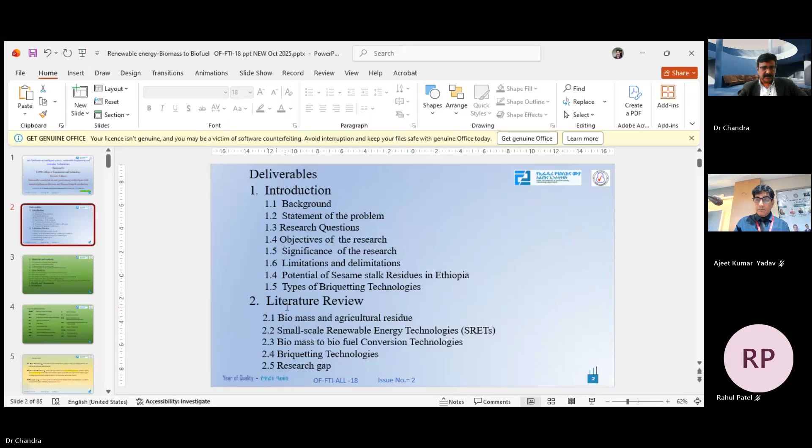These are standard headings so we will not waste much time. Then we have literature review, and we go to the next slide. So, materials and methods, and we will go for data analysis and then results and discussions.

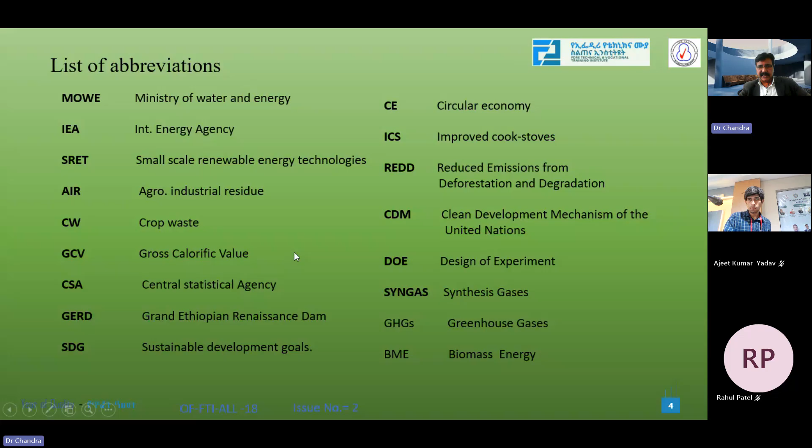Some abbreviations may be new, like MOWE, Ministry of Water and Energy. Circular economy we may use as CE, IEA for International Energy Agency. SRETs are small renewable energy technologies. AIR we will use for agro-industrial residue, crop waste, and gross calorific values, and SDG for Sustainable Development Goal. Syngas for synthesis gases, and greenhouse gases we all know.

So let's begin from the basics, like what do we mean by green engineering, sustainable engineering, renewable energy, and others. When people say green engineering, it's very common, green means it is related to environment, and mostly it has come from the plants.

The forests and plants are very important and vital for the ecosystem, for giving us oxygen, for controlling the environment, especially by absorbing the carbon dioxide emitted from vehicles, households, furnaces, electricity generation, and so much burning that we use even in stoves, which emits carbon dioxide.

So green manufacturing mostly focuses on our environment, and we should talk about pollution control and ensure our environment is protected. This includes eco-friendly materials, and nowadays we all know we are working on biodegradable materials, and also going for miniaturization — we should not waste too much material that could instead be produced using smaller amounts.

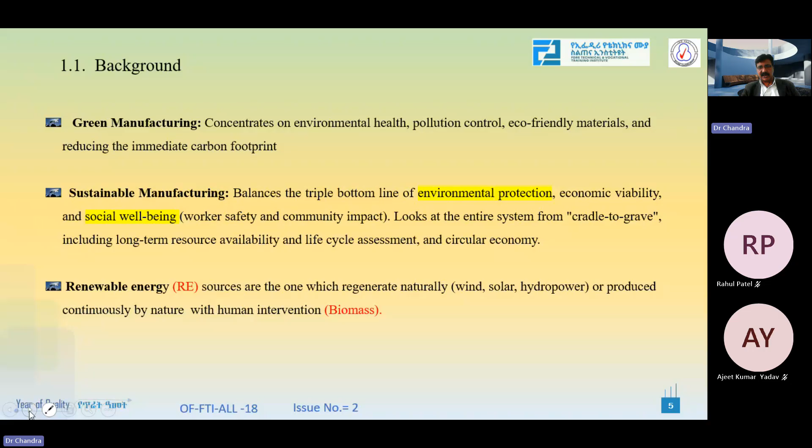Renewable energy - we know those energies which are renewable in nature, like wind, solar, hydropower, and they naturally appear and are available. Biomass - people talk about what is biomass, what are biogases. We have a lot of crop-based resources, and in India we are an agricultural economy with many crop-based leftovers. Awareness has to grow because leaving out maize straws, paddies and other things causes them to decompose and create methane and other gases.

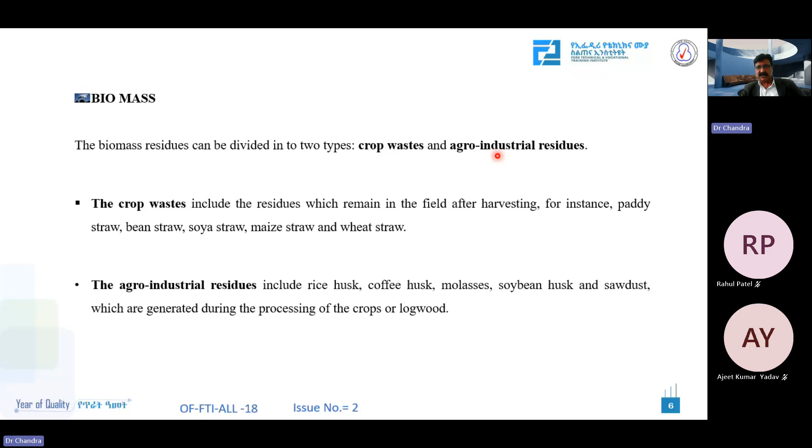Agro-industrial processing of agricultural things leaves byproducts, maybe coconut byproduct or maize cobs left out. These things fall in the category of biomass. We won't go much into this, but you will see some pictures. Globally we use 15% of energy consumption from biomass, and some countries use 90%, like Thailand, Philippines, and more of the African continent.

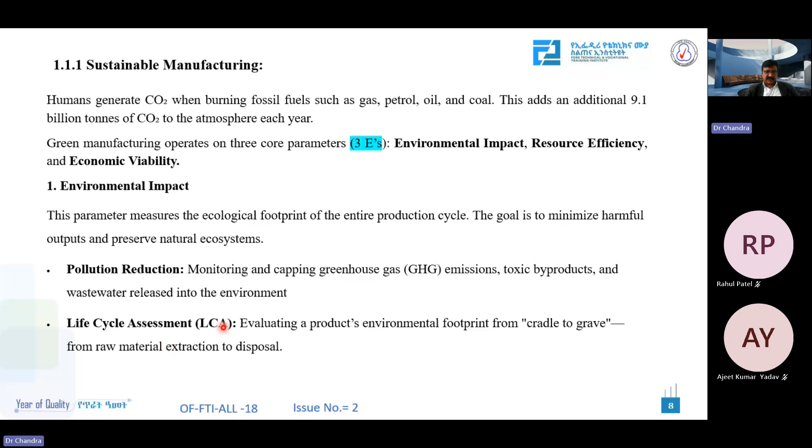Now we will see sustainable manufacturing, as we already cleared, has three things: the environment, that is the green part, and the other two are resource efficiency and economic viability. We will see the life cycle assessment in detail - people work on life cycle assessment, and we will see some examples.

You can see here the CO2 coming and nitrous oxide from chemical and other things, in gigatons of CO2, which is more than 50. From 1970, if we start, it was maybe little amount, around 30, and it has almost doubled. If this continues, I think it will be very, very difficult.

You can see the yellow part - transport and industry take the major share, and then energy production and conversion, that is again oil exploration and all that we do, is also a major huge contributor. Now people have understood the CO2 contribution comes from these areas, and that's why alternative energy - we mostly use solar nowadays, and we are also trying electric vehicles.

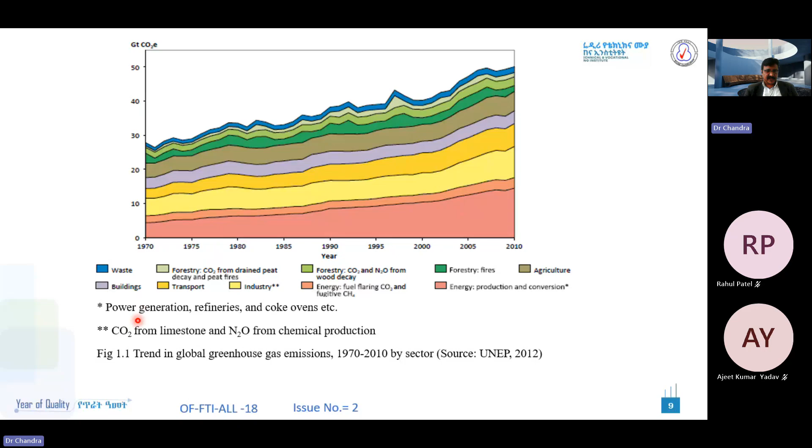So these are the indicators. When we say resource efficiency, we understand that any industry being set up today should not only focus on pollution standards like ISO 14000, 2000, but now they have to reduce, reuse, and recycle. Such things are the focus for any new industry to be established.

We know these biodegradable materials and recycling, whether plastic or iron or other things, involve a supply chain and refurbishment - old equipment is taken away and then refurbished to be used again.

Now coming to efficiency, we can achieve it by optimization, by new material, but innovation is very important. What do we mean by innovation? Innovation is something very different from the past concept or past technology we use. Generally we use adaptive designs - whatever is there, we put it into a similar type of fan in one way or another. Sometimes we use it for pumping, same mechanism; sometimes for air blowers - that is adaptive.

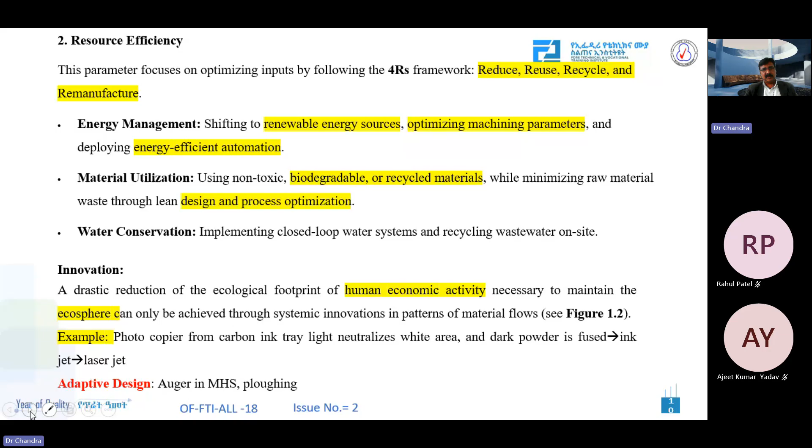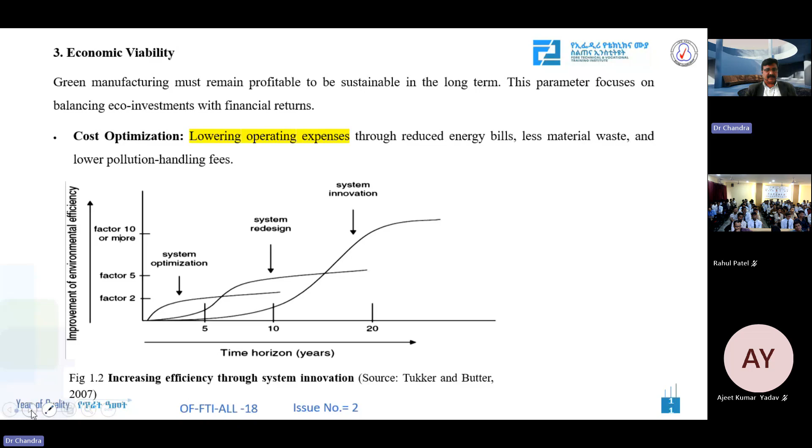Innovations are the way, and that's why innovation centers are created, incubation centers are created, and now we are also doing startups in India. You have to think of making something new. We are relying on something - if the house is made of bricks, we just see it's available, this one, and adaptability is not there. People are very hesitant. So we have to make our thinking different, and we should adopt an innovative approach.

So I think the focus, and nowadays a lot of discussion is going on about the budget on education, people are saying, and you are all aware, yes or no? Hello, are you hearing me? So we know the budget - in 2014 it was 80,000 crores, now it has increased to 140,000 crore.

But if we convert it in terms of GDP, it is not significant. In dollar terms, it is really alarming, and people have to be aware - we have opened so many universities, and now the share becomes very small. So I think these are some of the things.

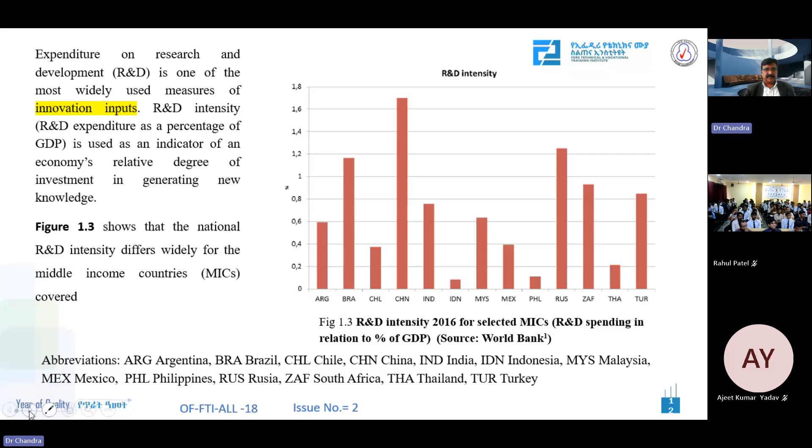Now you can see other countries like Brazil - Brazil is much above India. And if you see a country like Malaysia, their GDP is very small, but still they are sharing, no problem for them. And if you see a country like Turkey, their situation is still such that it is clear they are really doing relatively well. So we have to focus on that.

Now because we are talking about green and sustainable planet, researches are going on - because of too much CO2 emissions from different sources, they want to pressurize it with very high pumps, and at high pressure it can become liquid. They want to put it in the earth's core where these stones are, and this will slowly get converted - oxygen will be released, and carbon will be left so that this can again become fossil fuel. These things are already in the research areas in developed countries.

Miniaturization - I have already talked about making smaller items, smaller things. We should not make things too big. You know everything is becoming smaller, even a SIM card, we are going from normal to micro to now nano, and then no need, it can be removed. Similarly there are many things - if we see engines earlier and now, we don't want to unnecessarily waste too much material. So these are miniaturization approaches.

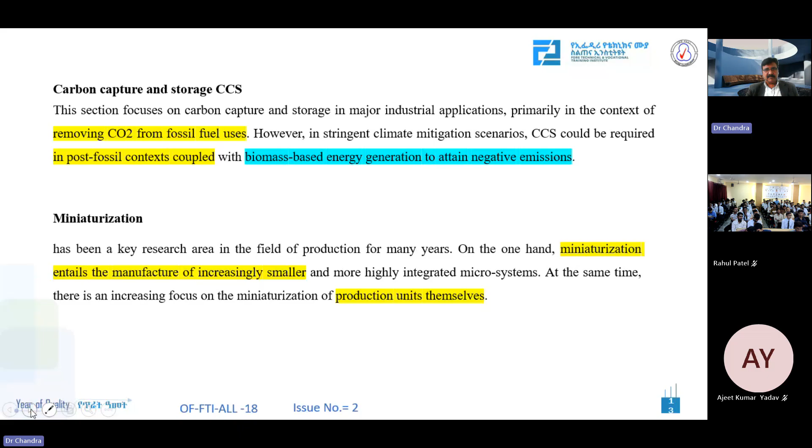Now let's go fast to some examples related to mechanical engineering and different areas, like how we do these things. We talk about green manufacturing - examples like near net shape forming and near net shape powder metallurgy. So now we are not converting solid material by forging or by melting and giving shape through casting.

We are trying to give near net shape by powder metallurgy forming, so very small amount of machining is required.

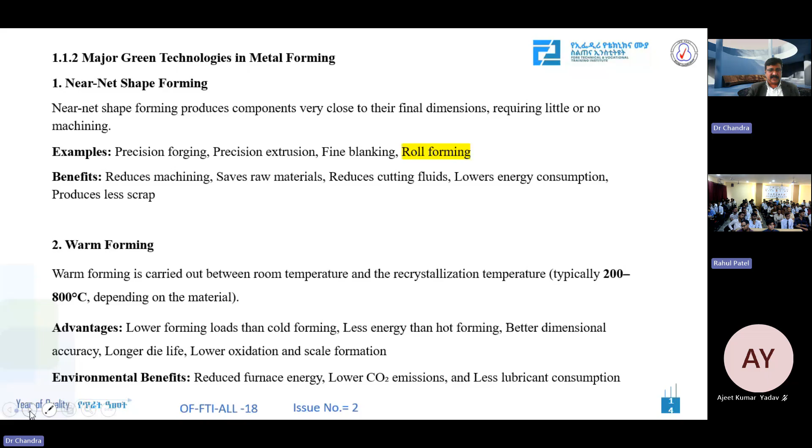Similarly, when we are doing cold forging, it needs a lot of force and energy. So we must go for warming them and doing it without altering their microstructural properties, their strength, fatigue strength, compressive strength and others.

For high efficiency hot forming, we should not use the old type of burning too much coal, which pollutes the environment. You can find blacksmiths nowadays on the roadside who give you whatever you need - shovel, fork, knife - but they emit a lot of carbon dioxide.

So we should use induction furnace, resistance furnace, infrared, so that rapid heating and energy saving can be done. These are some initiatives worldwide people are taking, as technology is changing and the same conventional old furnaces are not sufficient.

We should also talk about lubricants, or whether there should be any lubricant at all. We should use vegetable oils, synthetic, biodegradable lubricants, and some kind of nano lubricant, so they can reduce pollution.

We should also use tools with advanced coating, like physical vapor deposition and chemical vapor deposition. We should also import or work on advanced technology so that tool life is increased and we need not waste time grinding, redressing and regrinding.

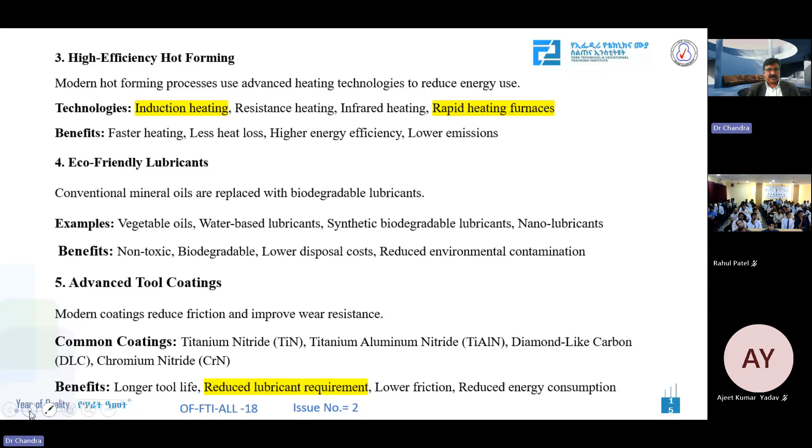So they are using superplastic forming at high temperature, low strain rate, so the material can be very lightweight, especially for jet engines and supersonic fighter jets. The material is one of the challenges to design the blades, which are under very advanced technologies.

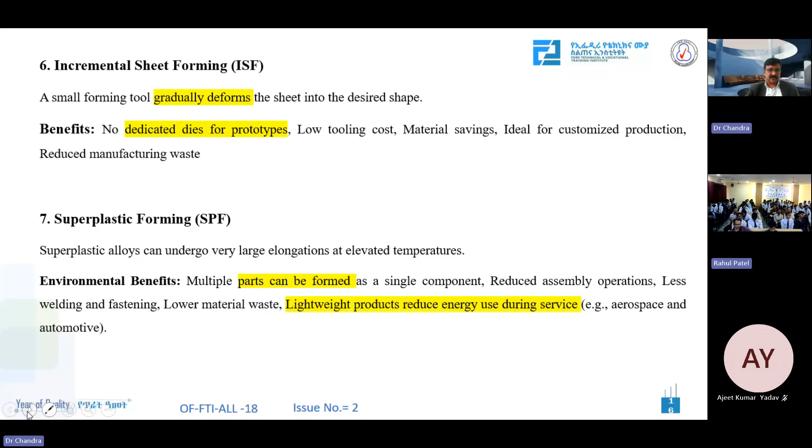Now we see that energy consumption must be minimized. There are techniques with very high speed, not like 1000 or 5000 rpm - machines are running beyond 50,000 rpm, even 170,000 rpm.

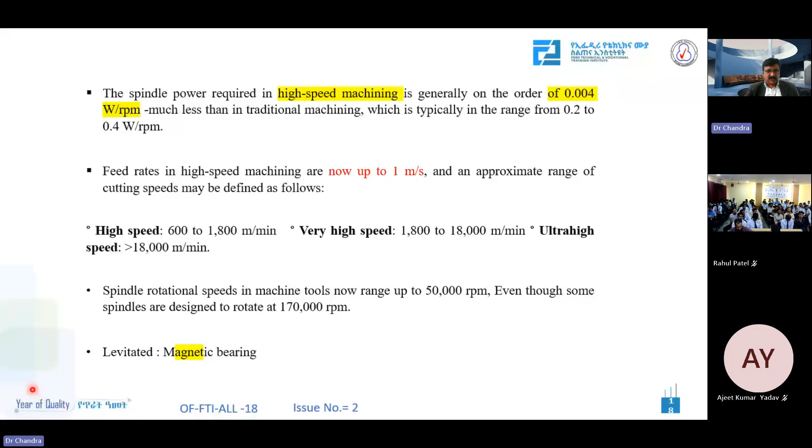These rpm levels cannot be made possible using traditional bearings, so we use levitated magnetic bearings - this is called high speed machining, HSM. At that high speed, temperature is not transferred to the tool but taken away with the chip, and we don't even need lubricant. So such new technology we have to use.

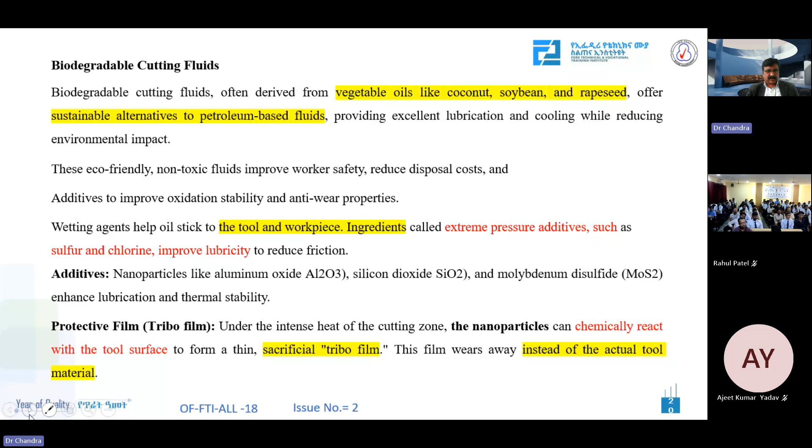With lubricants, we should use highly pressurized ones with additives. Research has to be done to improve lubricity and reduce friction, pressurizing them in the form of a spray so a small amount of lubricant can take much higher heat. These are areas where people are working on technology for sustainability.

We already talked about minimizing air emissions. The other one is water consumption - water footprint is another very challenging area for sustainability. So we have to reuse and recycle.

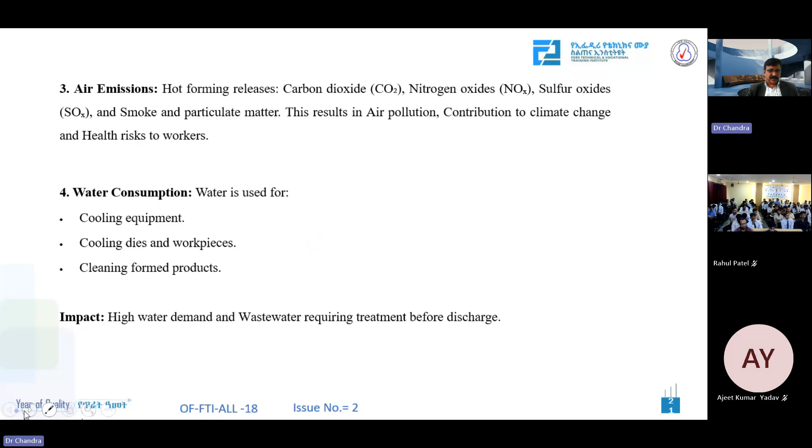Every factory, whether tannery or chemical, shows people acting like educated fools - claiming to be educated but, for example in electroplating with acid cleaning, there is no civic sense, and municipal corporations are not taking it seriously. Those waters flow into our drainage systems across the city, polluting the water and causing diseases and problems because there is no prevention. It is really very worrisome.

Now let me tell you why water is important. Water is seen as free, and people are just spoiling it - even from houses, they are just washing without care.

They are doing something in place of one bucket or five buckets - an open shower - simply keeping the water lines open and sitting. That's very bad. You can see, if you are drinking one cup of coffee, before it even reaches one cup, it has already used 132 liters of water.

And if you look at wheat, we know that 1 kg of wheat uses 3300 liters of water, because we use flooded irrigation. It's the same for rice.

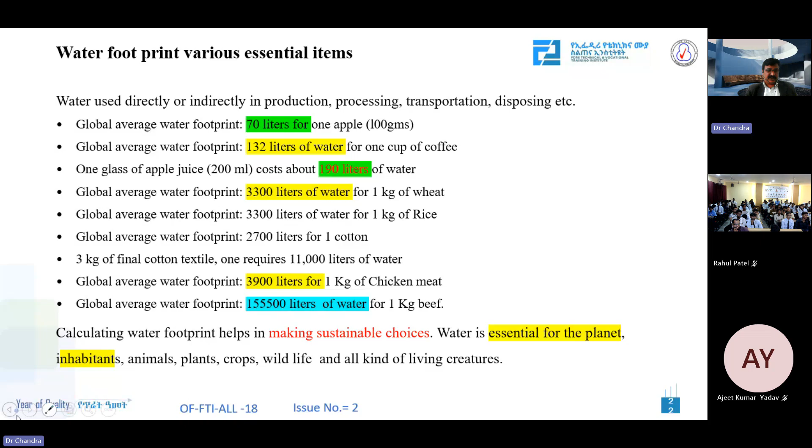And if you think of cotton, we get cloth, we use it, and we throw it away without maintaining it. It has consumed 2700 liters, which is very, very high. And for those who are non-vegetarian, chicken consumes 3900 liters of water by the time it reaches you, after washing and cleaning.

So these are all issues where water life cycle assessment is important. We should not simply look at the surface, because some things we have not valued - we say it is naturally available so there is no cost, but it is costing. That's why life cycle assessment is very important.

As we discussed, from extraction, processing, manufacturing, handling, transportation, use, and disposal - all of this is very important whenever we want to do something. That's why it is called cradle to grave. Now a lot of research is being done on the life cycle assessment of products being made.

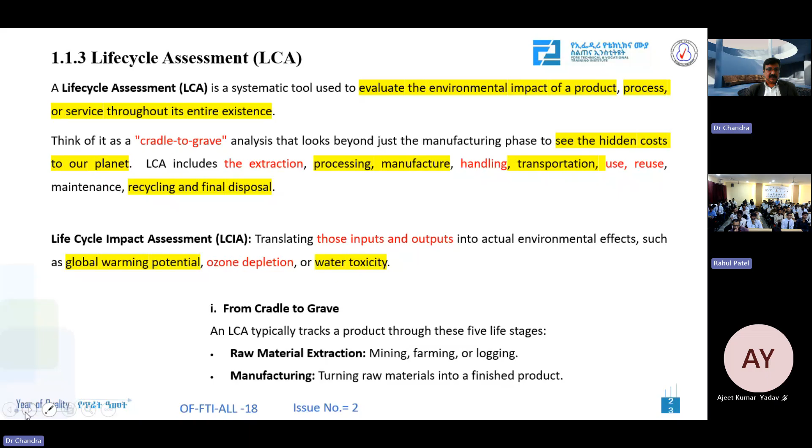You can see here, sometimes when we look at life cycle assessment, we compare plastic bags and paper bags. When we look at raw materials, of course plastic is natural crude oil, while the paper bag is made from wood. When we consider energy use for wood, we use more energy.

But the mass of solid waste in grams - for one paper bag it is 50 grams, while plastic is only 14 grams. Mass of CO2 produced: for one paper bag it is 0.53, for plastic bag it is 0.23. And looking at volume of fresh water used, we see this difference too.

You can see 4520 for fresh water, and this is 255 for cooling and other applications. So here it seems like CO2 production is less for plastic.

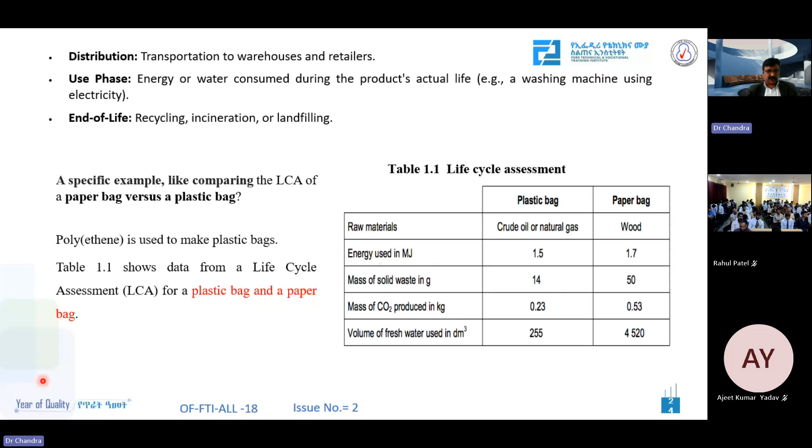Life cycle assessment is not just about biodegradability. That's another issue, and now you can see that life cycle wise, the paper bag seems very challenging compared to the plastic bag. But anyway, the disposal aspect has to be looked after - that is one parameter which is very bad for plastic.

Now we go to simulations, because all the students here are engineering students, and whenever we design any product, we should not just go and cut, weld, and build it directly. That's not actually possible - that's just copying something from YouTube learning without knowing the material properties inside. So we have to know about the microstructure, about alloys, and other components involved.

There are many types of steel: mild steel, medium carbon, high carbon, stainless steel like 310, 410, and others. These components have different properties, and the price is also different. So you have to decide which is optimal for your cost, mass, and design - this has to be advanced.

Simulation can provide results without having to actually produce something by die and punch, where you might find failures later, wasting a lot of time and energy. A little knowledge is very dangerous, so you have to be very thorough, otherwise there is a risk.

Similarly, you can save cost using simulation. For those who are mechanical engineers, using ultimate tensile testing we can find what is happening - how much elongation, what will be the ultimate tensile strength, yield strength, and plastic deformation.

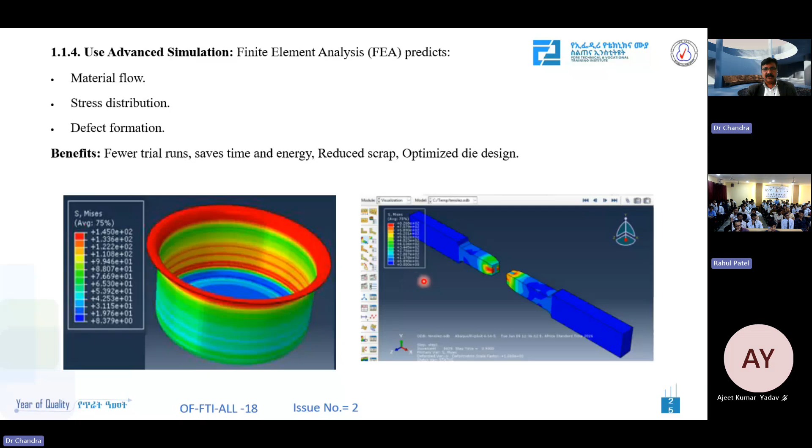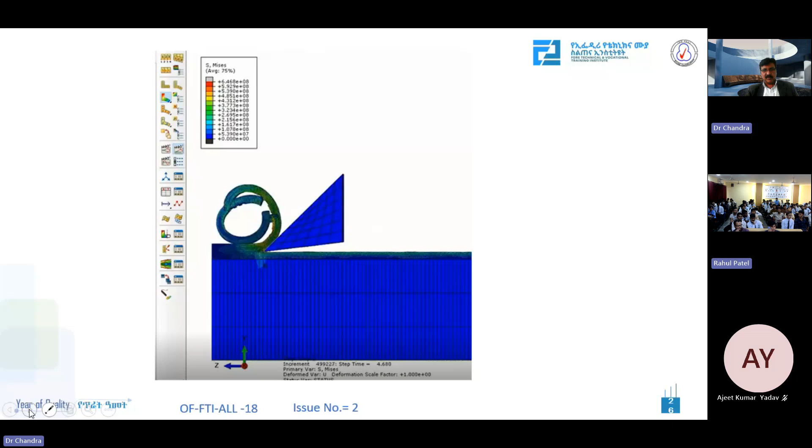This can easily be found by simulation. Here you can see even for machining we can do the same - we should find out what will happen to the tool, what is the tool material, whether it will withstand the process, using artificial intelligence, internet of things, and machine learning.

Now, I think for all engineers, whether civil, mechanical, electrical, electronics, or computer - in our olden days we used to learn, I don't know how many people know this, it was QuickBasic, then came Fortran, formula translation, then Pascal, then C, then it became C++. After that it changed to so many languages - Java, Python - and I think Python is now one of the main areas where you will explore and find a lot of things.

My personal appeal is that anyone from any area, not just computer science, must know Python. There is so much learning available thanks to YouTube - you can use Jupyter Notebook, Anaconda, and you should know all the libraries. It's very handy to learn for solving your problems, and you can get help from ChatGPT and others. So it should not be taken lightly, thinking you can do it anytime - it is very important. Please all of you go and learn the libraries: NumPy, math, and others, matplotlib or other tools.

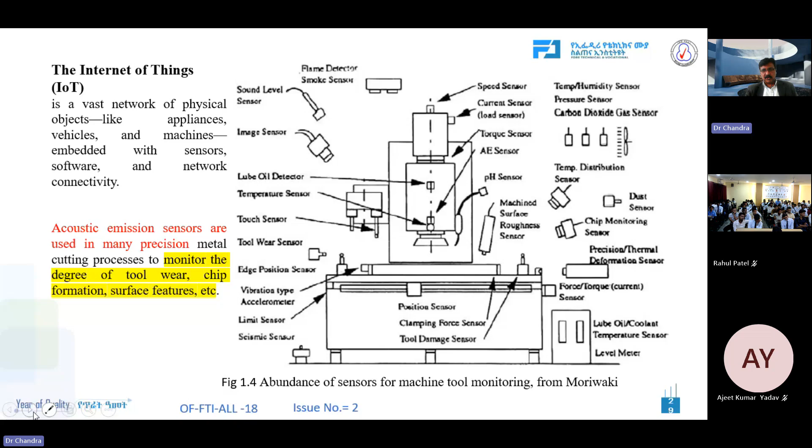When atoms, the lattice, or crystal grains are touched and moved, if there is an abnormality, you can detect it. There are a lot of other things like eddy current sensors to detect this. Many people are aware of load cells to measure forces and torques, and strain gauges are used for that. So we have to look for and create something related to this.

Now coming to another area - bioenergy. You can see here the percentage share: coal is 13%, oil is 40% - you can believe oil is the maximum, petrol and diesel and other things. Bioenergy has 11%, and then we have 19% electricity.

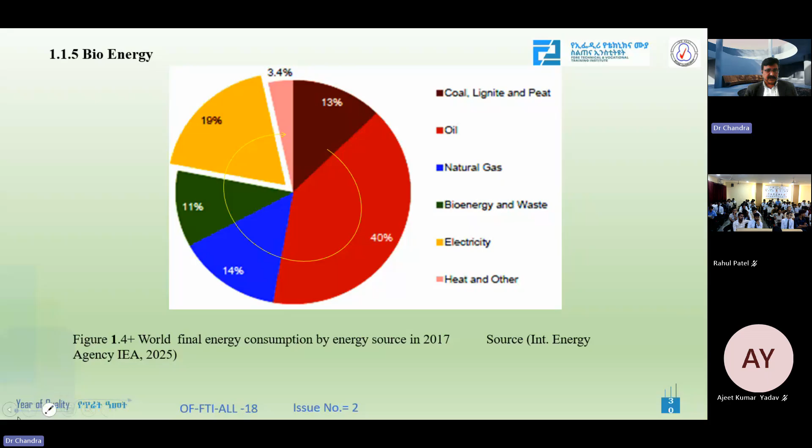This is the worldwide data, but when we see our own energy consumption, it is also important to understand. This figure is just to know - knowing ourselves is the first step to either progress or not. Can you see this graph here?

Liter of oil per day - now it's something like 0, then 0.5, 1, 2, 3, 4, 5, 6, 7, 8, up to this side where the scale is high because otherwise it would become too long. Here you can see 5, then 10, 20, 30, 40, 50. Now can you see this one - India?

If you see their consumption per day, per capita is very important. Here is Pakistan, of course, and Nigeria is more - okay, but they have other issues. India is here, and you can see Costa Rica, Brazil, Mexico, China, Russia, Israel, Japan, Sweden, Canada, US. This directly reflects that our per capita may be low, which reflects a kind of economic condition at the individual level.

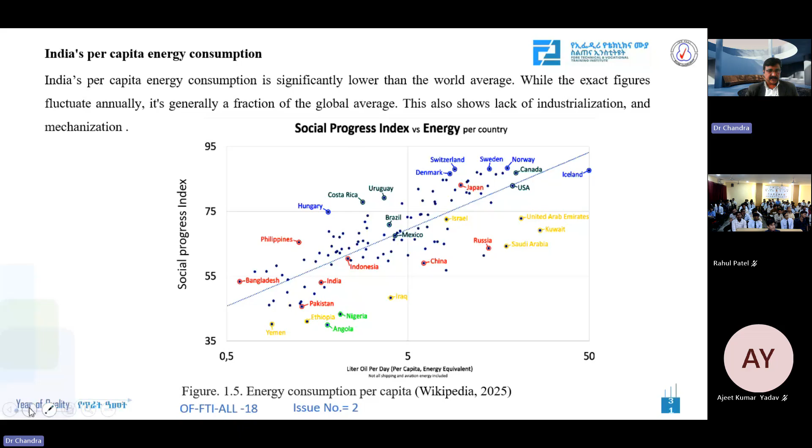Now we come to some renewable energy data, with special reference to a case country. The case country - if you're aware, India is the main one for the International Solar Alliance, but America has already withdrawn from that. It withdrew its funding after Mr. Trump became president. Solar energy has very limited application here, though it has very good sunshine. If there are people from the electrical field, they can talk about it - we have one of our very good colleagues, Dr. Ajeet, from electrical engineering, who can also discuss what it is.

Geothermal capacity is 10,000 megawatts, but only 70 megawatts is actually used. There are other geothermal projects America is working on.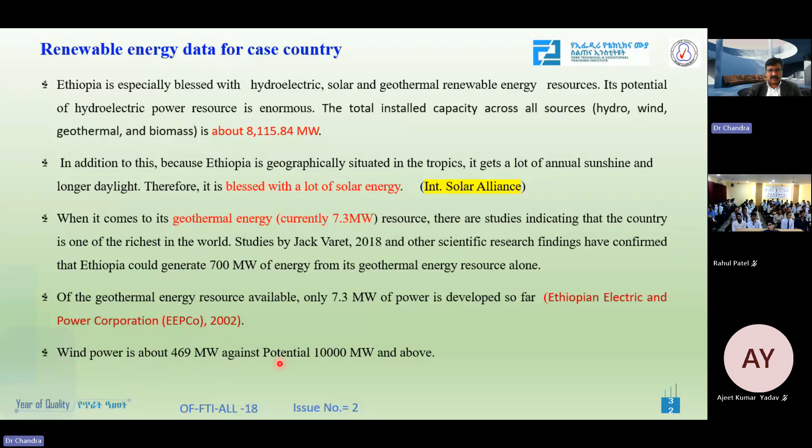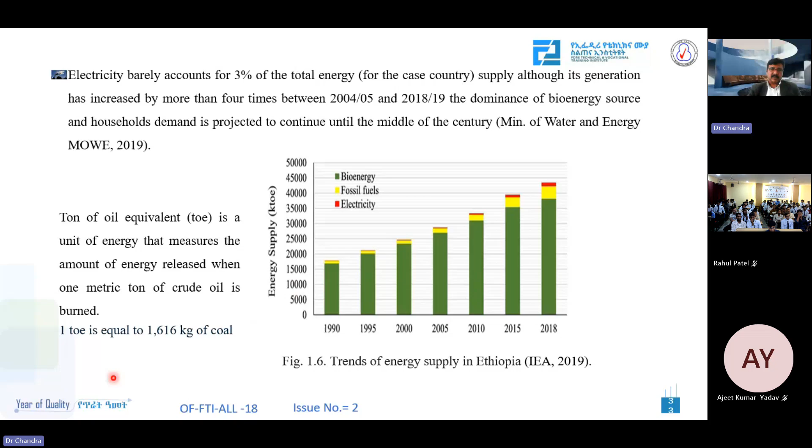So wind power is also very high here, but less exploited. And here the problem is, when you see the bioenergy, bioenergy is almost invariably associated with forests. Forests can be used for carbon credits nowadays, but they are using it here for bioenergy, for burning, cooking, coffee, everything. It's their cultural way, so they are using that.

And here, for India, we have tried to do this, but at the village level, cylinders and such, people are going back to using wood. They have to use something like these rocket-fired chulhas or stoves, if they're anyway using wood or agricultural stalks.

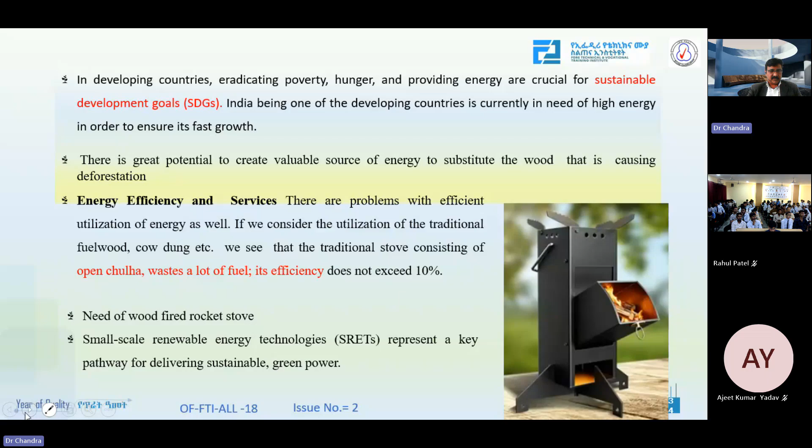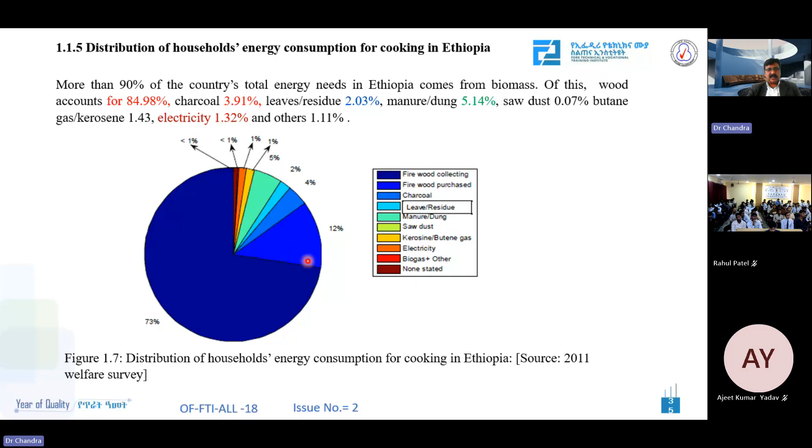Now here you can see again firewood, fire charcoal. So all this, almost 90% is used by them. There is a great challenge in African countries. You can see a very limited amount, 1%, 2% electricity used especially for house applications.

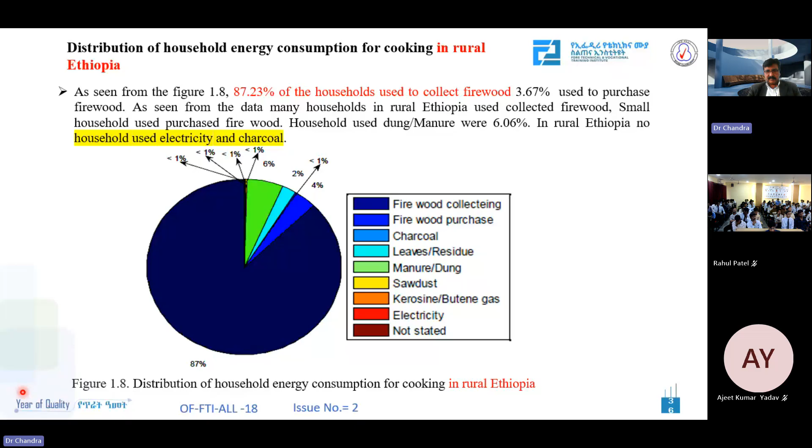The remaining is mainly cooking, because the temperature around the year here is less than 20, or around 20. So they don't need fans or air conditioning in cars or houses, but only for cooking and slow cooking, like the traditional way in India sometimes. So anyway, these are the energy figures and facts, and we have seen the biomass in earlier figures also.

Now here we try to see that if we have data, we can convert it. There is bamboo, which, if you Google it, we find even our incense sticks, agarbatti, uses bamboo imported in tons from China. And China, for your surprise, many of you must have heard of the China Amazon. Like America has the Amazon forest, China has created a bamboo forest, used for so many applications.

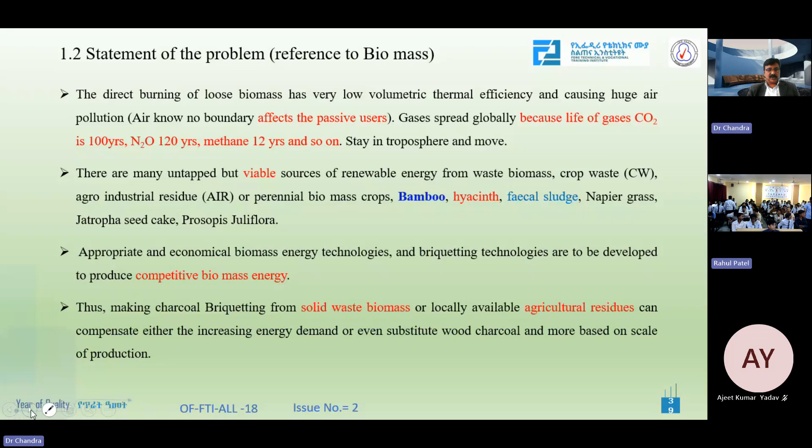There are bamboo varieties which have high carbon content, and we should also focus on that. We have a lot of jalkumbi (hyacinth), napier grass, jatropha, and prosopis juliflora, and we can use all of them. Now India is also taking the initiative that all thermal power plants should have 5% biomass. Even coal plants and oil-fired plants should also have 5% to 10% biomass.

So we have to consider questions like deforestation and soil erosion, because we are cutting plants, and oxygen deficiency is happening. Carbon dioxide is not being absorbed because there are no plants, and carbon dioxide becomes a problem if it's in excess. Everything at an optimal level is good. There are a lot of health hazards, respiratory problems and other exposures, especially for women and children. That is why the approach of giving gas cylinders, gas supply to all areas, came about.

So this was one of those areas, but sustainability again becomes a question. If you do something, are you sustaining it? If you are not sustaining it, it is equally dangerous. You start something, and then you suffer again. So this Ujjwala scheme has come now - how much progress has it made? We have to see the status.

It's not a one-time thing. Plants are planted every year - 1 billion plants planted, second year another 1 billion planted, 5 years you find 5 billion. But if you go there, you don't find even 500 plants surviving. So that is one very important thing we should monitor afterward - like with a product, we have after-sales service. We should see, after some time, what has happened after 2 years, 1 year, where it has gone.

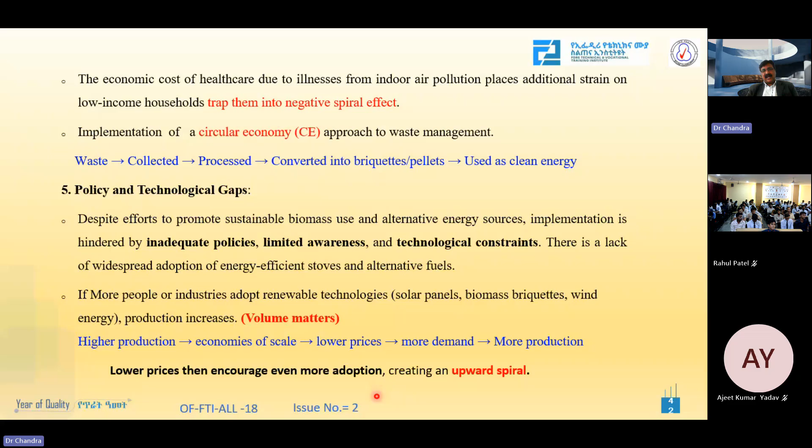If you have low volume, higher price, less demand, then the price is high. So we have to see these policies and other things.

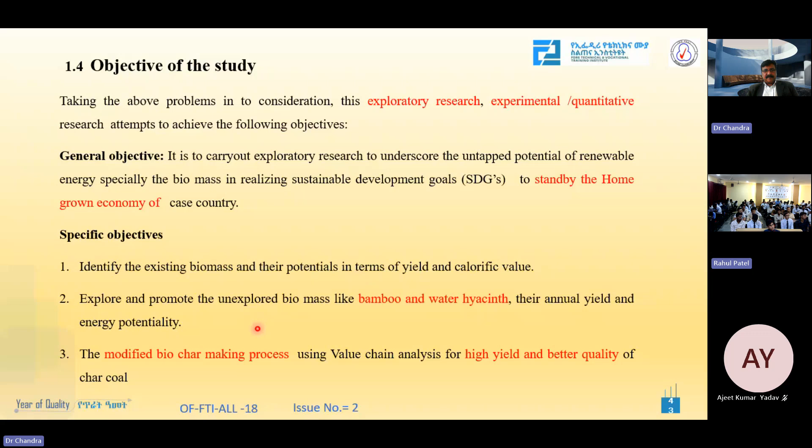Now our objectives are here, because with specific reference to biomass, we try to get the data and other issues. The significance is we can save our planet, because of the greenhouse effect.

Many people think the greenhouse effect should be bad, but greenhouse is good because we need these greenhouse gases. If we don't have methane, carbon dioxide, nitrogen oxide, if our environment is open, then in daytime we get too much sunshine, and when the sun is not there, we may get completely frozen because all heat will be going back. So the greenhouse effect is good, but only to a certain level.

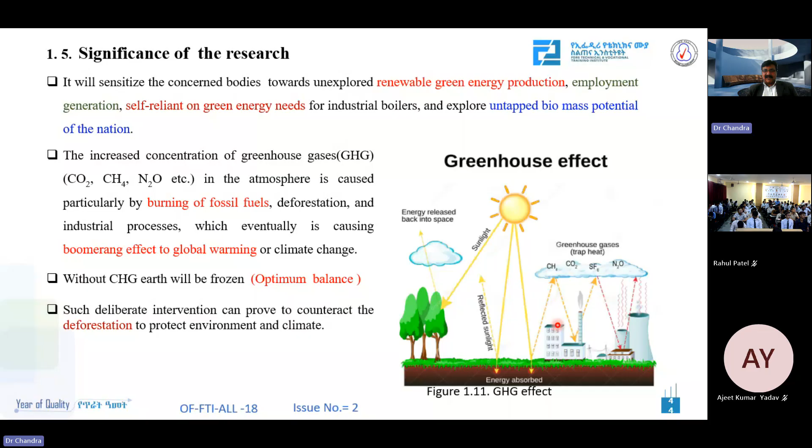But if it is too much, the heat from the soil cannot go back, and then we see what is happening in India. At night we are still having a lot of heat because temperature is rising, and summer is very unhealthy. So such things we have to find out.

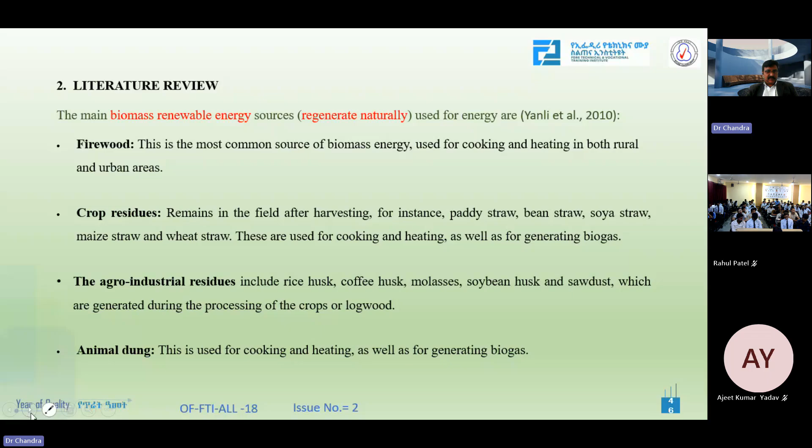So here we have some data, a literature review I collected through the internet and from some people, for agriculture crop residue in major areas. There are biomasses given in different areas wherever there are agricultural kinds of things.

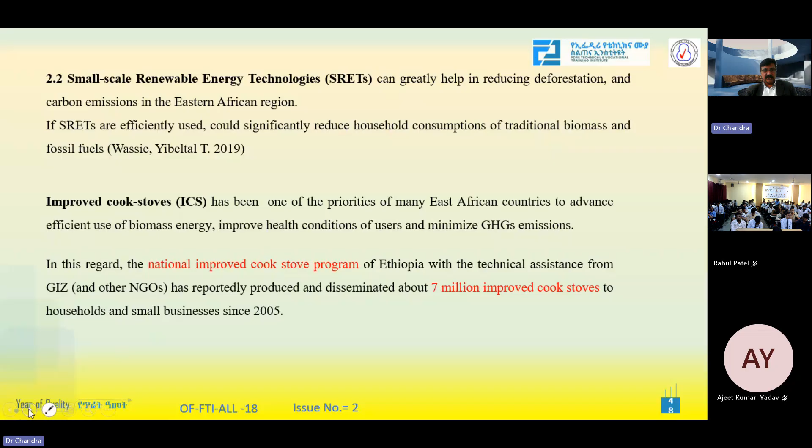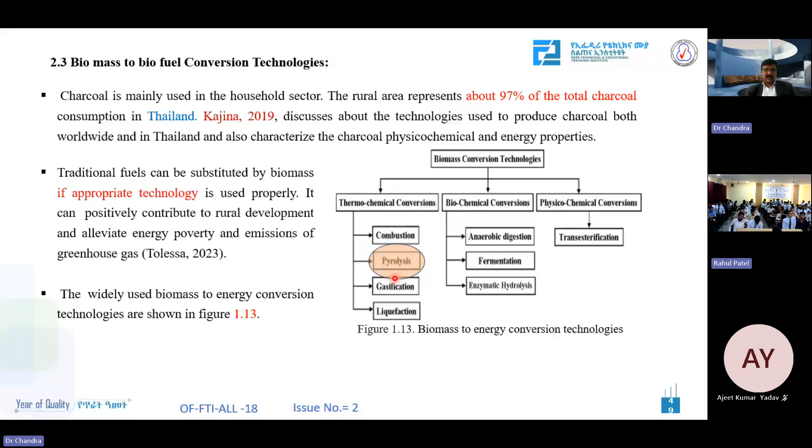So we have to use improved cook stoves, small scale renewable energy technologies that must be developed not only for stoves but in other areas. Here we use biomass conversion. One method is thermochemical, which we call carbonization or pyrolysis. That must be used.

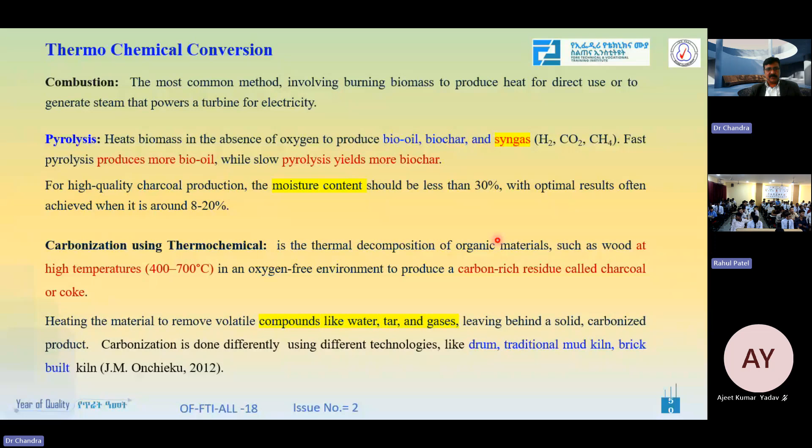Okay sir, anyway, pyrolysis basically produces synthesis gases, and we have to take out all of them, because we understand that plants absorb carbon dioxide, and that carbon dioxide we have to convert into carbon, and oxygen will be released. How we convert that is called pyrolysis or carbonization. So we have to heat it, and there are temperature zones.

In the first stage, when we heat, the moisture content is 12 to 15%, and when heated up to 200 degrees, the water will be vaporized, and still the wood or biomass is intact. Then we go for pre-carbonization.

Then up to 300 centigrade you get something like liquid and tar and some acetic acid type of thing, and methanol. So we need a system with temperature control, as these byproducts are coming out.

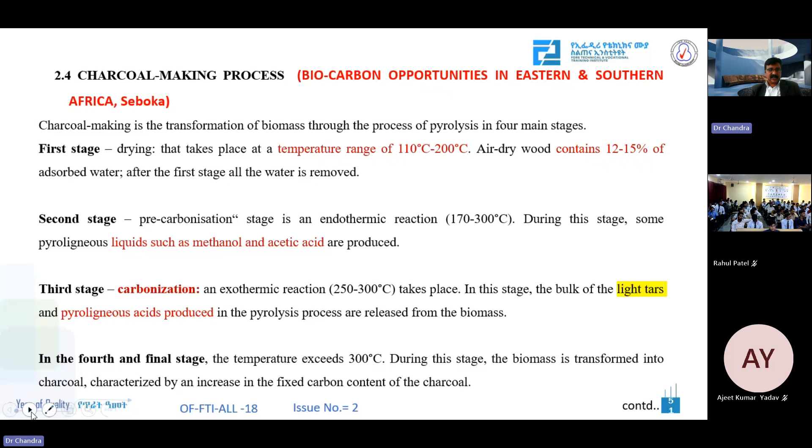And when we go above 300 degree centigrade, carbonization takes place, and we find that fixed carbon content will be left. That is called charcoal. So finally, scientifically, we take out carbon dioxide there, some part of that is coming out, because the tar is coming, and there is water which is called wood vinegar.

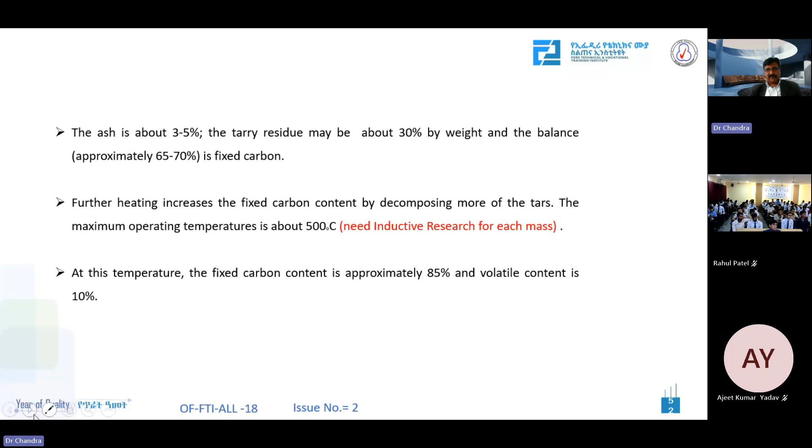All these byproducts are biodegradable and environment friendly, and from different species or types of wood, we get something like 65 to 70% fixed carbon that can be used. Even that can be supplied to NTPC, and that is mandatory.

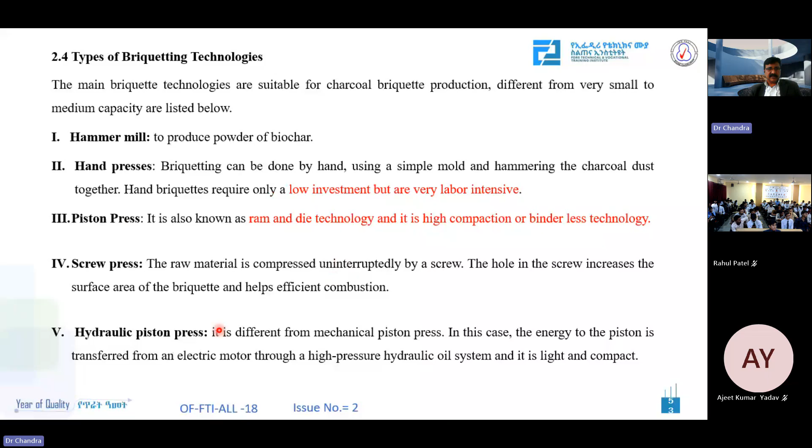Now people are using straw from, umm, we use mustard, tuar, and so many pulses. We use that and then compress it, and after that process we get these kinds of briquettes done.

Here we found some people using very traditional methods. A drum is there, with firing from the bottom, keeping control. Sometimes there is internal firing with no temperature control and no proper time control. Sometimes it is burned more, and the temperature is sufficient to create the charcoal, but if you open it when there is sufficient heat, it will catch fire.

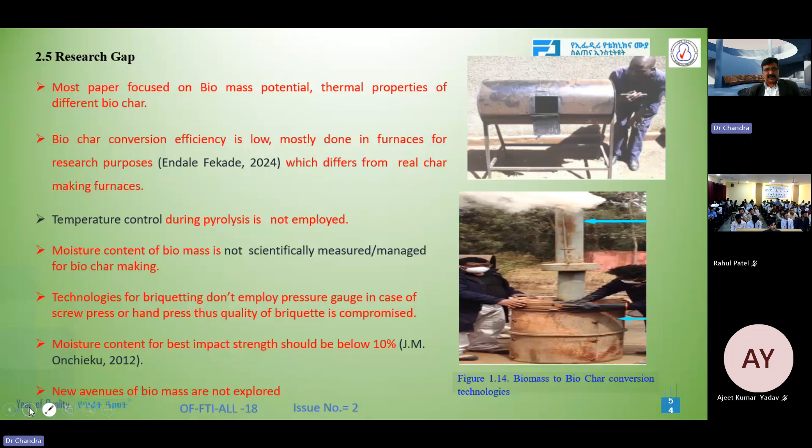So it takes time, and actually these are not efficient methods. Because of that, in India, NTPC requires less than 5% ash, so that should be controlled.

If you are doing something without control, then it's a problem. You have wood, vinegar, methane, CO2 used even for extinguishers, firefighting equipment fitted with carbon dioxide, which is heavy. Whenever these extinguishers are fired, oxygen is replaced and CO2 remains, so the fire can be stopped.

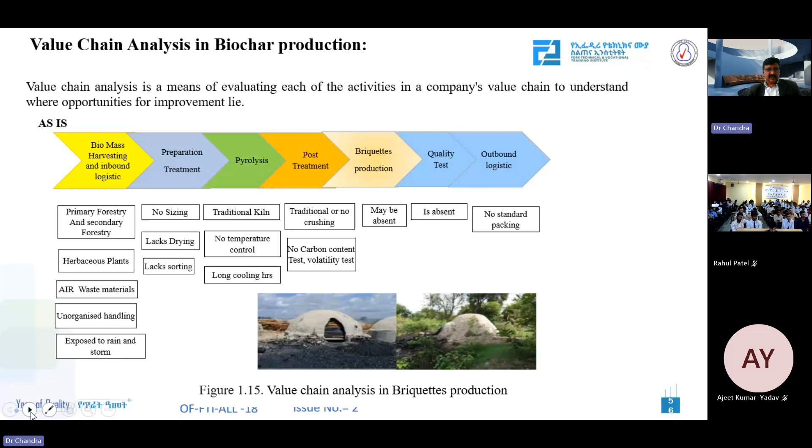Traditionally, in some places people use this kind of charcoal production, making houses and filling them, similar to how pottery people bake their matkas and other items. It is non-professional, but here the pyrolysis must be proper, meaning the temperature must be controlled, and collecting CO2 is very useful for extinguishers.

We have methane and wood, which can be filtered layer by layer because it will be condensed here. We should use a kind of hammer which is more efficient for sustainability. Now advanced countries are even using the fecal matter or sludge from toilets, taking the toilet sludge and converting it.

They convert it into biochar or carbon, which is one of the very promising methods. It is fast because they cool it with water, a more industrialized approach. Immediately your input comes in and output comes after cooling. It does not catch fire.

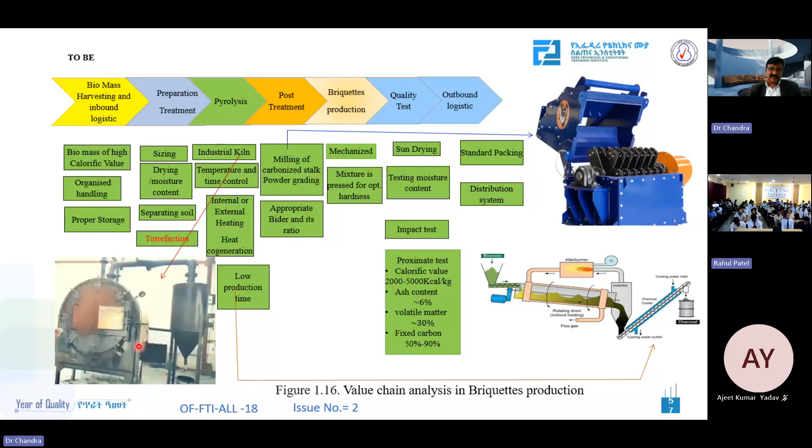But this one has to stay for 5 to 6 hours until it cools down. If you open it by chance, it will catch fire. So such things are there.

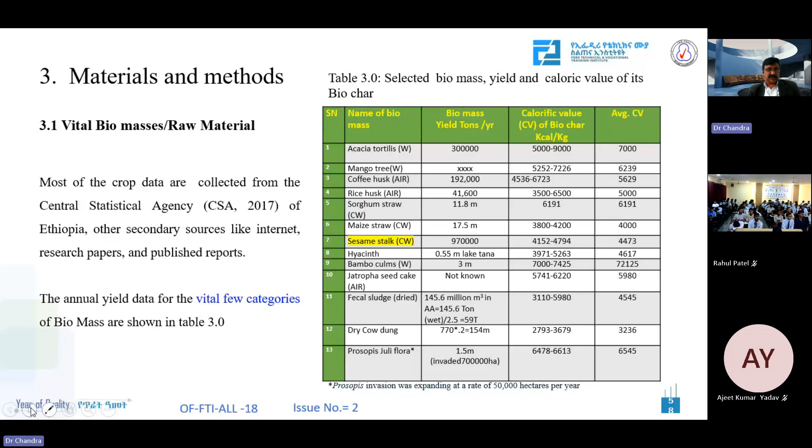If we take the average, you can see these figures from bamboo. These are the kinds of bamboo people have in many places. It's not that these bamboos are not being used - there are dendrocalamus, bambusa, tulda and others. For your information, the dietary silica is very high in bamboo.

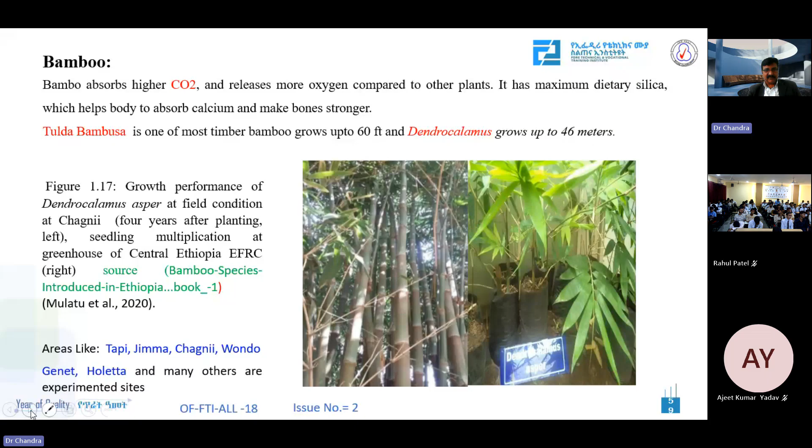If we use these leaves for tea, it will help in absorbing calcium. So we should also use this - that's why bamboo used to be considered good. Sometimes we have forgotten some knowledge which was there.

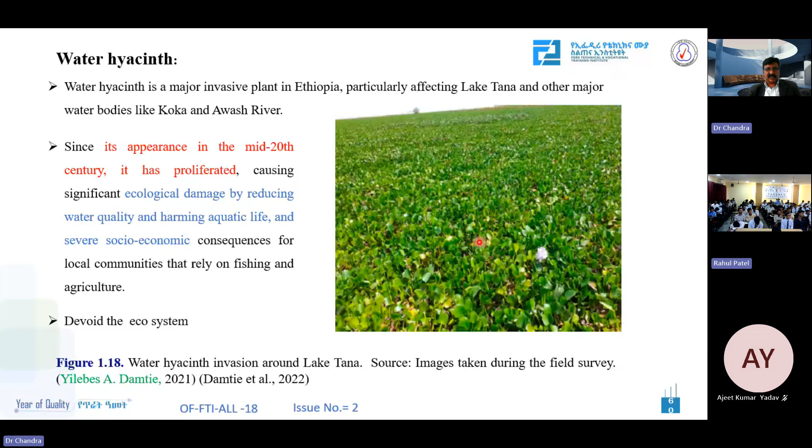Water hyacinth is very terrible for ecology. It spoils the complete water system, and because sunshine doesn't reach the bottom, other microorganisms will die, and even fish will die because there's no oxygen mixing. But it is very good for conversion to biomass. There are a lot of data and things, so I will skip them.

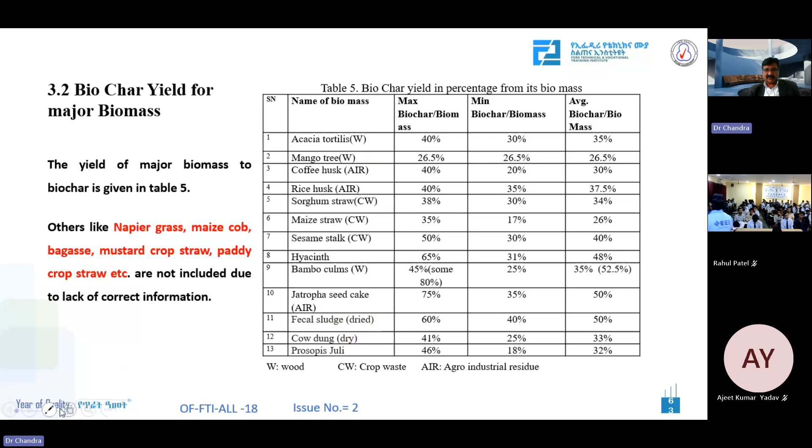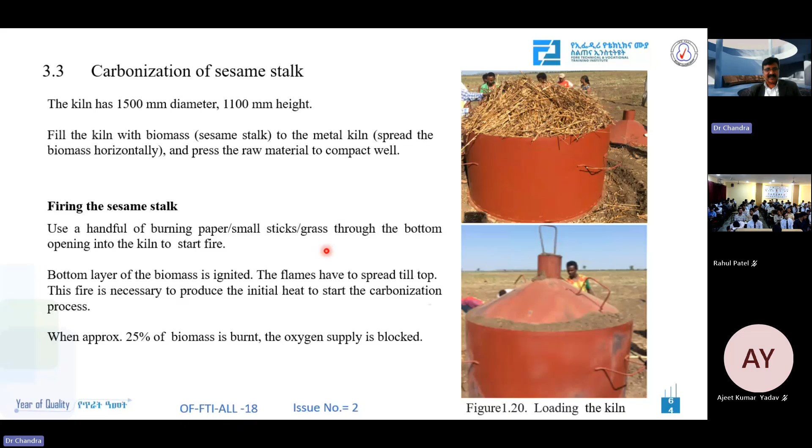Acacia and others - when we converted acacia which were common, not touching the forest, these are the only ones which are renewable. We tried to conduct this on a small budget. You can see we used a drum and self-firing with some timing, and we got results.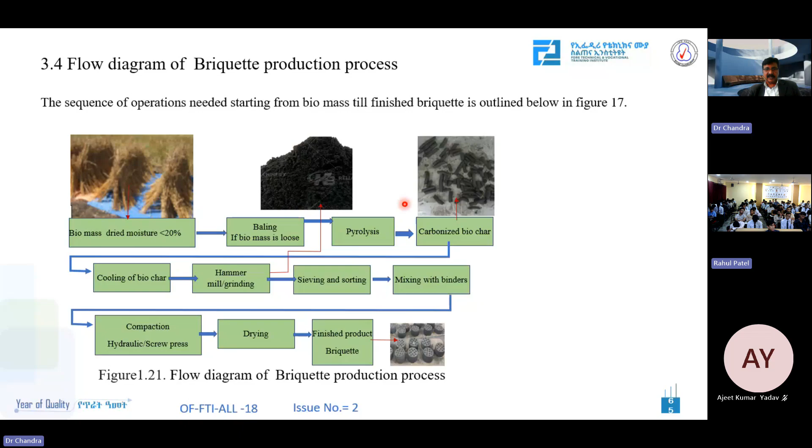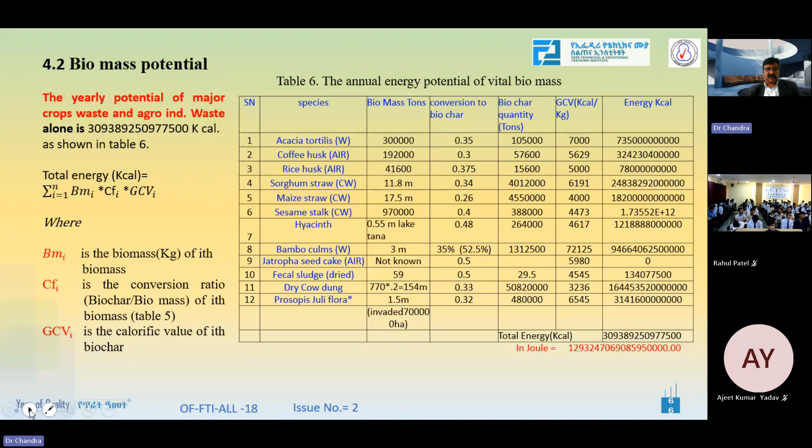We calculated how much energy we can get, because this kind of drum type is very low cost. The energy was 1293247069085950000 joules. When we convert this into petajoules, it was around 1293 point something petajoules. We took other authors' figures which gave a range, but I found it to be this much.

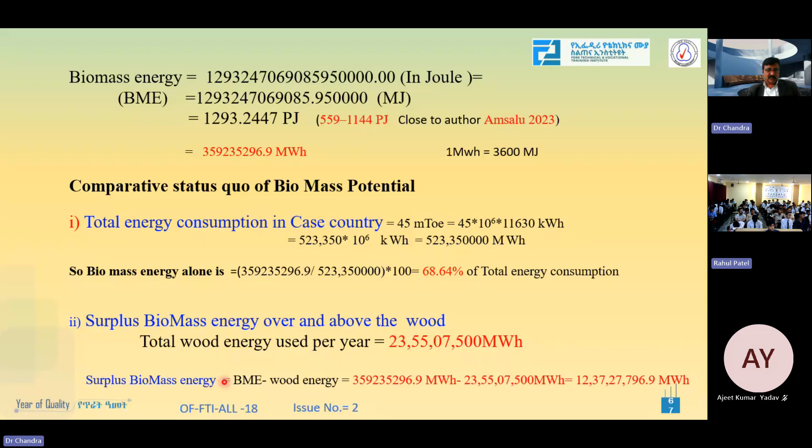This can be converted into how many tons of wood equivalent we could have used, and how many hectares of land that would be equivalent to. All that can be interpreted later.

Now for the binder, we first created this kind of mixture - there is ash and some percentage, and we get this much biochar with different timing. 4.2 minutes was okay, and that was sufficient for this kind of condition.

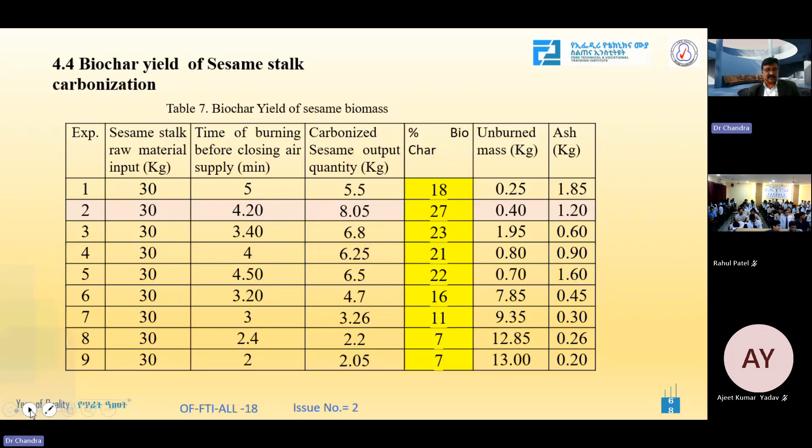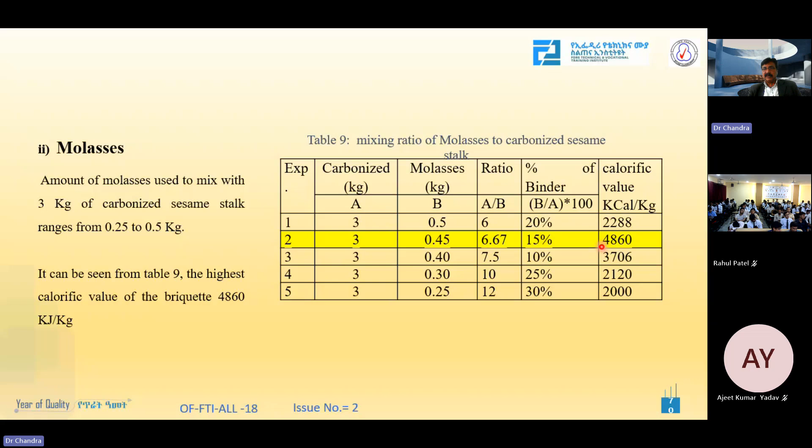When mixed with cow dung at 20% binder, we get 4540. When we did it with molasses at 15%, the calorific value was very high, which we tested, while clay gives 4540. So here we find that the binder molasses gives the highest value, meaning we should use that binder.

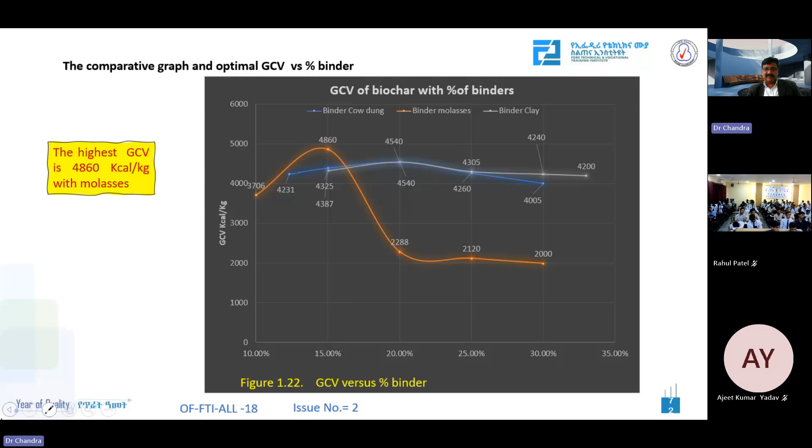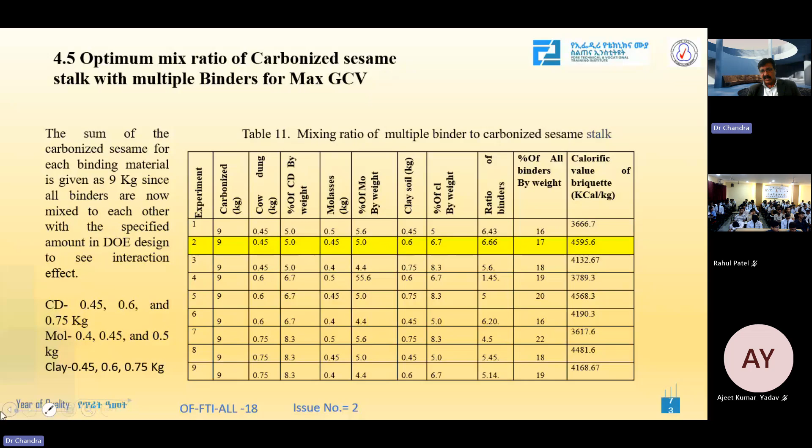Then we thought maybe there is a synergic effect if we combine all three. We used some percentage, like 5% cow dung, 5% molasses, 6% or so clay, in a different experiment. But we didn't find that promising, the combination was not better, rather it was reducing the value. We don't know the reason.

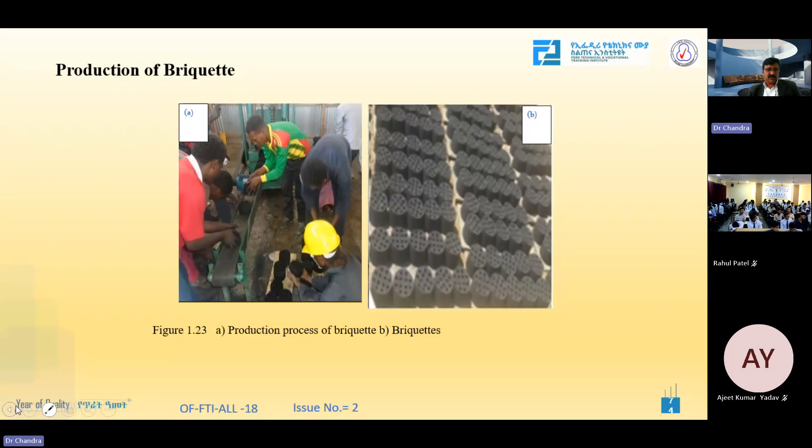You can see here these briquettes, and these people working, and this is very nice. It has a long shelf life and is very handy. It is smokeless, and these things can be used for cooking, even compared to cow dung, because it has very high calorific value, almost equivalent to natural wood.

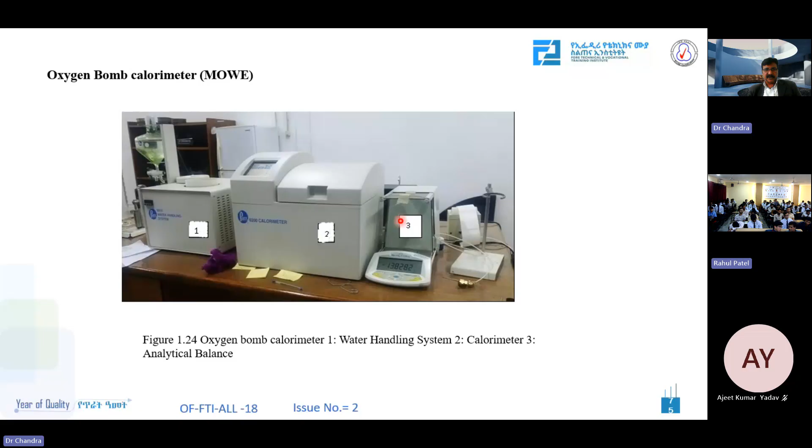More than that, tests were done using an oxygen bomb calorimeter. We heated and then checked the calorific value.

So, results and discussion. Anyway, you have seen this country with a small amount of this, which is equivalent to, you can see here, how many megawatt hours. So this is, I think, 246... 359 million megawatt hours. This much electricity, this much energy can be produced, and this is equivalent to 176 million tons of wood if we use wood.

And if we ask where this wood will come from, one hectare will have 100 tons of wood. So if we see this, you can see that this one is 14,143.5.

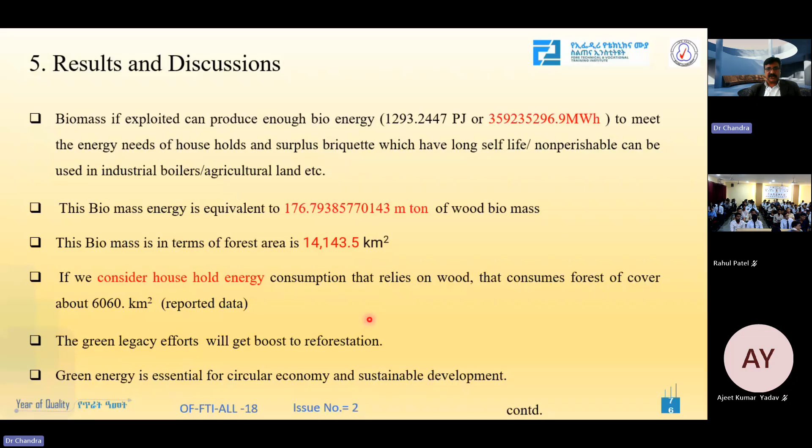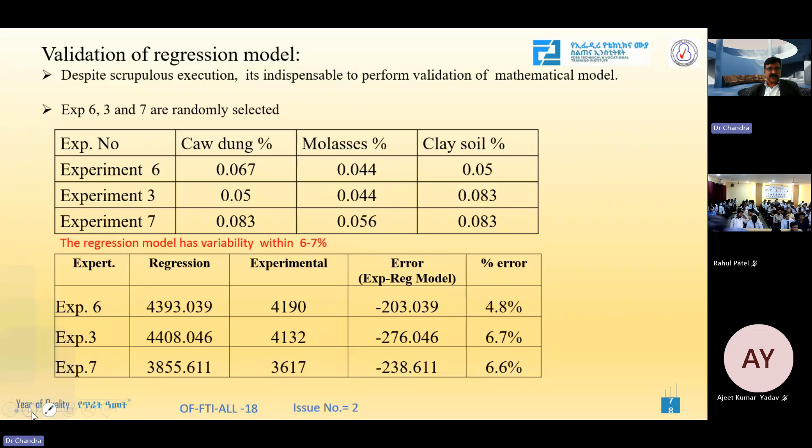Finished, the results and discussion. So anyway, these green energy, now I think most of the things are there. So already the results are there. We have also done regression to find out if there is anything better than that, and there isn't, because the combination doesn't go beyond that.

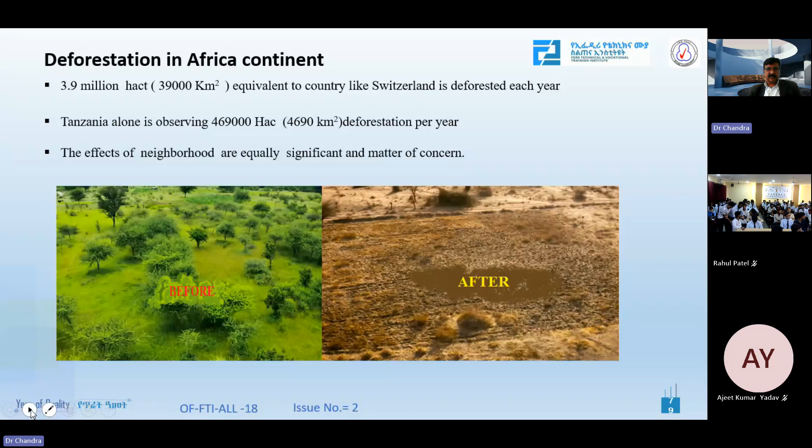So you can see that this was 20 or 30 years before in Tanzania and other regions we call the sub-Saharan region. 20 years before it was like this, the left side, and now it is like this. So the takeaway is adoption and other issues, and the references, no need to see.